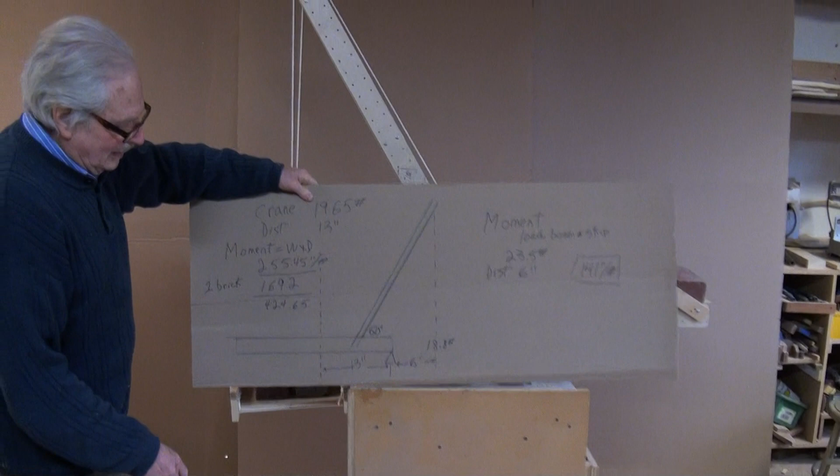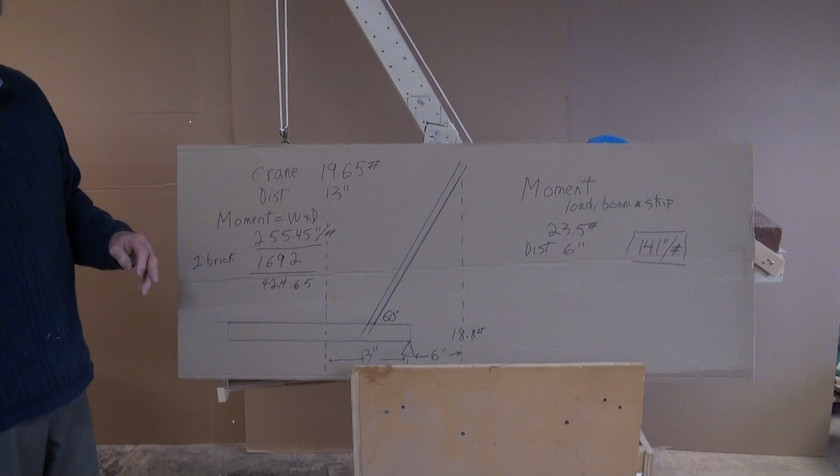The weight of the crane, here's the weight of the crane, and the distance is 13 inches. Remember Archimedes in the bathtub? Weight times distance is how you compute what the turning force is, the torque or the moment.

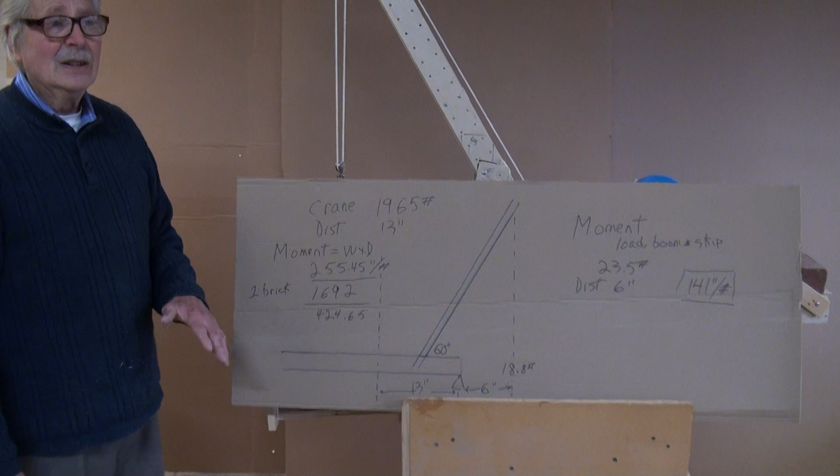Mechanical engineers like the term torque, automotive engineers, torque. Structural engineers and crane guys use the term moment of force or just moment. So that's what we'll use. So the moment of the crane is the weight times the distance.

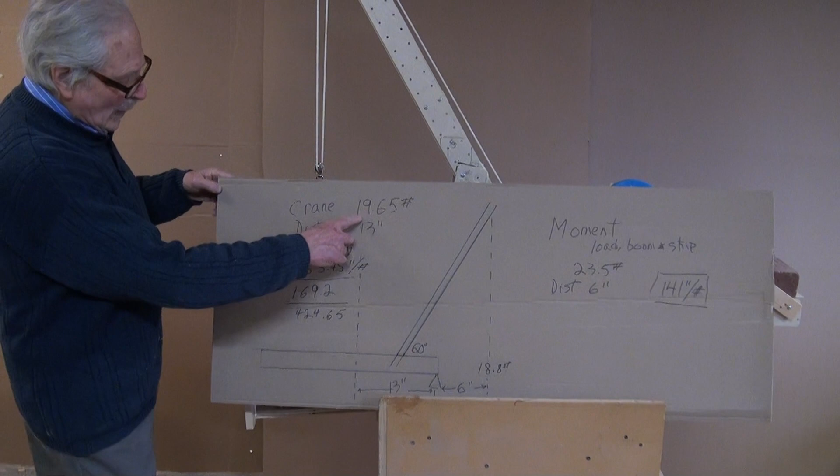You get 255 inch-pounds. I then added a brick. See the brick way over there? The brick is 36 inches away from the pivot point. So 36 times 4.7, 169.2. Add them up, we get 424.65 inch-pounds.

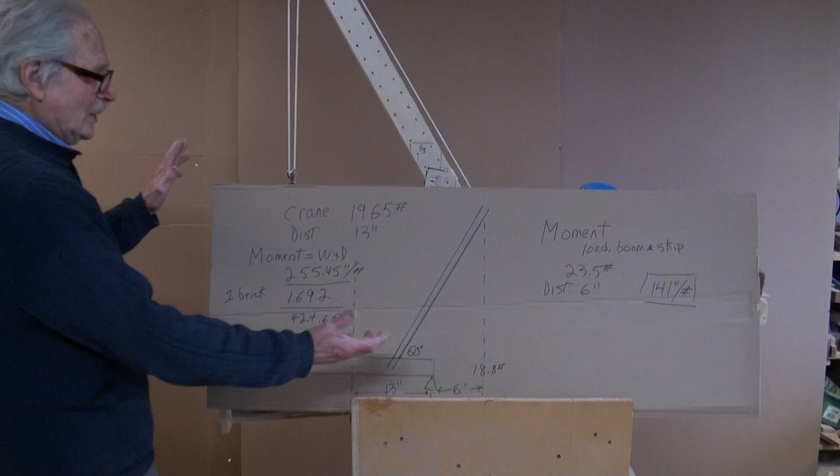So that's the moment of the crane that wants to, if there was no load here, the crane might want to rotate that way. Now the load, we got 4 bricks and part of the boom and the skip. This is called the skip, the fixture that holds up the load. All of that, 23.5 pounds, and the distance is 6 inches.

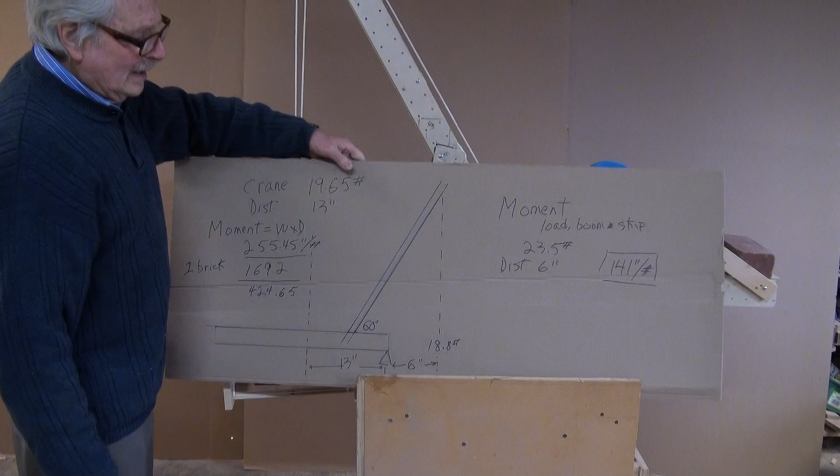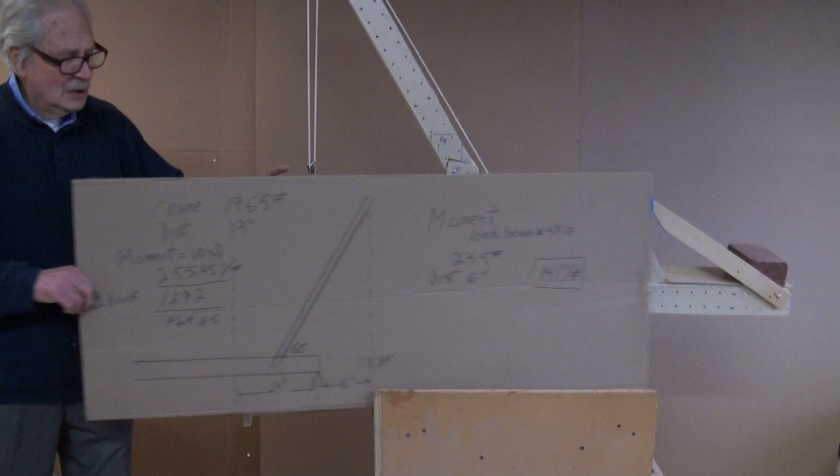From the center of gravity of the load to the pivot point is 6 inches. Multiply those two, that's what you get, 141. This is much greater than that, so the crane is stable, it's not going to tip over. Now, what would happen if we change the angle of the boom to 30 degrees? So cut, and I'll re-rig everything.